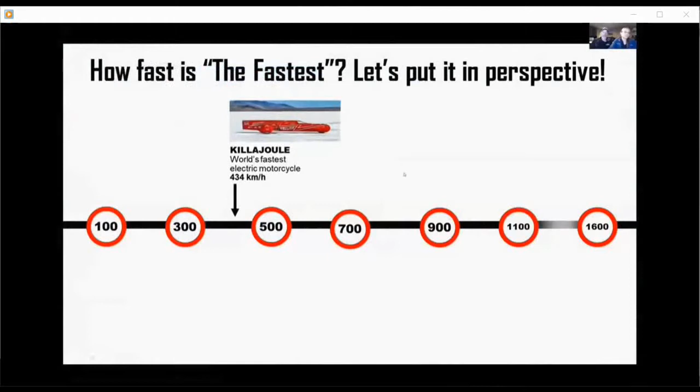The KillaJoule is currently the world's fastest electric motorcycle, and we'd like to put that in perspective, because lots of people talk about being the fastest, and there are many fastest vehicles. On a scale, we are at about 400 kilometers per hour. That's just a tiny bit slower than the world's fastest production car, if you can think of these very low series cars as production cars, but that's what they claim. I think it costs about the same as the KillaJoule, maybe more - oh yeah, it costs way more, that's Koenigsegg, maybe $1 million. Even if that's the fastest production car, that's a whole lot slower than the fastest wheel-driven car, which recently posted speeds over 700 kilometers per hour.

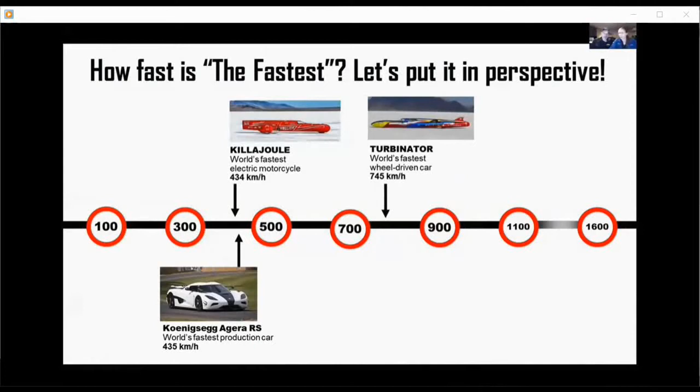A lot faster than your typical family car. My Nissan Leaf wouldn't even do that kind of speed, but it takes me where I need to go.

If we look a little bit historically, in 1889 the fastest car in the world was actually electric. Since then, internal combustion has completely dominated everything. Well, we had the sidecar record briefly - okay, I guess that's true, for a very brief moment, for a couple of years. The KillaJoule was also the world's fastest sidecar motorcycle. Full stop. We had it, and then they figured out what we were doing, and then someone took that away. So records are never owned, they are only borrowed for longer or shorter time.

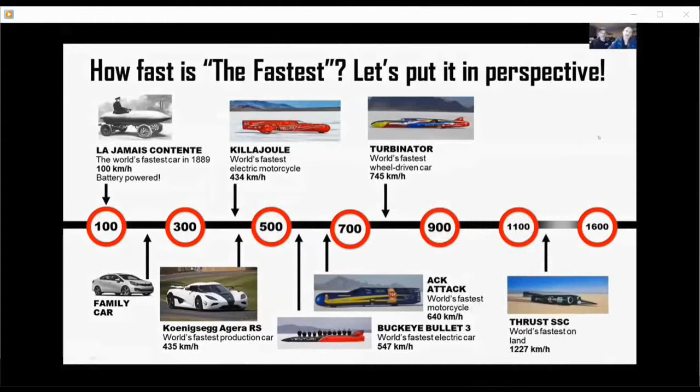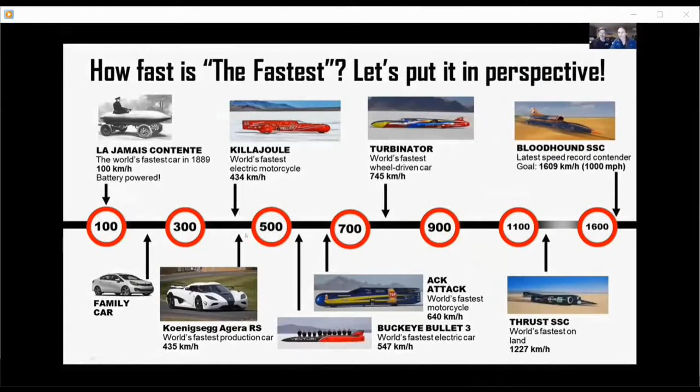We are still quite slow compared to the world's fastest electric car, which is about 550 kilometers per hour, which is also slow compared to the world's fastest motorcycle at 640. All of these are quite slow compared to the world's fastest car overall, which has gone supersonic, which again is slow compared to the latest, the British Bloodhound, that's shooting for 1,000 miles per hour. So that's a little bit of perspective of where we are, and you can see there is lots of room for improvement in speeds.

So that's kind of where we are and what we're doing. When we started building the KillaJoule, we had a dream, but it was actually not about speed, even if that may sound strange. I am a tree hugger at heart - Bill is kind of a tree hugger too. I like trees, you like trees - I'm the real tree hugger, yeah, I don't hug them. I've always been this way - I want to save the planet, but I also like fast vehicles and engineering, and how do we combine the two.

As am I. So our dream was actually to make people understand that electric cars are great. You can tell a joke here about British cars - can I? Okay, I think you can. The reason the Brits haven't come out with an electric car these days is because they haven't discovered how to make them leak oil in the proper manner. And they're far away enough so they can't hit us - no, they can't hit us.

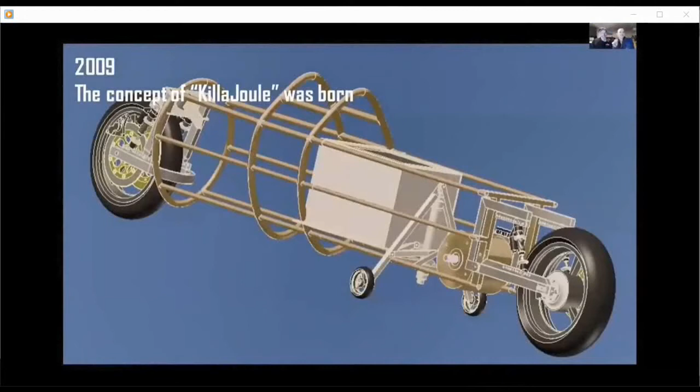I guess this is the equivalent of a sonogram for a racing vehicle - this is the very first, first early CAD. And then being on a budget, we bought a $750 Craigslist motorcycle - Craigslist is equivalent to Trade Me or the local eBay marketplace. We never even started it because we didn't care if it ran or not, we wanted the brakes, we wanted the wheels, because buying new brakes and wheels was way outside our budget. And this was cheap, so we bought this one.

So we had this totally naive idea that we were going to build a streamliner for $10,000 in a year. And we ended up - well, we're still not done yet - but the KillaJoule, we spent 9 years on it, and I don't even want to think, I can't, it just consumes. We would have owned two Teslas if we hadn't built this. Anyway, we bought this motorcycle.

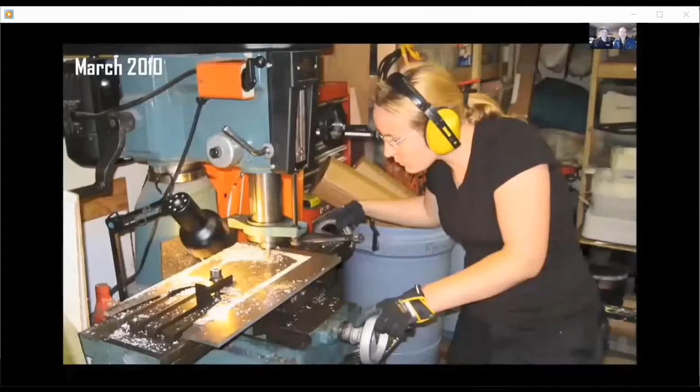And his uncle - that's right, he grabbed his uncle, wonderful couple of people, kind of like Bert and Ernie actually, a little bit like Bert and Ernie. I don't know if we have a picture of Gary in here - yeah, that's the uncle's name. Anyway, we spent a week cutting away, bending, working, grinding, and about 5 days later, we had - there he is.

And we had first chassis. Here's my very first test ride, and we thought, oh, we are almost done. We built the streamliner in 5 days.

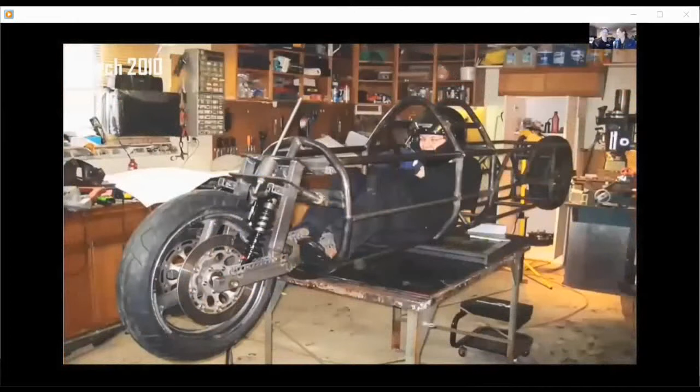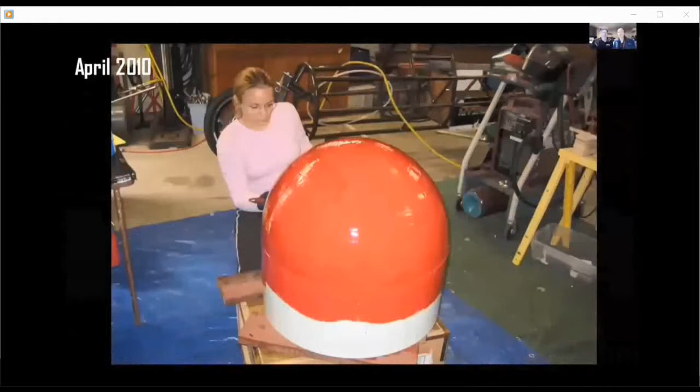Then, okay, this one has to be covered in bodywork, and a fiberglass body of this size is about $30,000, $40,000, $50,000 or so. Didn't fit in that $10,000 budget, so I thought, it's about round on the nose, and then pretty much straight in the back, like a toothpaste tube. So I bought myself a Pilates ball, and then I stretched my composite skills and made a nose cone.

And somewhere along the way, I ran out of volunteers, so I recruited my mom, who was foolish enough to visit me in Colorado. So she was put to work. She's a mechanical engineer as well, but she claims the statute of limitations ran out a number of years ago—she doesn't do it anymore. Everyone in her family is an engineer: her brothers, her father, her mother, everyone. So it's a genetic disorder. It's definitely a genetic disorder.

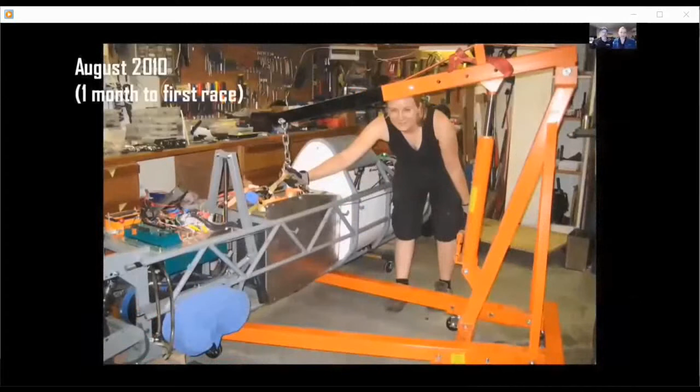So this was August. Race was scheduled for September. In August, we had 1 month left before we were leaving to Bonneville. By the way, we had never been to Bonneville. We just thought, let's build a streamliner motorcycle because we want to set a speed record. And if you want to go really fast, you have to build some sort of streamlined vehicle—that will always beat the open vehicles. And we settled for a motorcycle because you get a whole lot more speed for your money in a smaller vehicle. Also, we couldn't fit a car in the trailer either.

So we settled for a fully enclosed streamlined motorcycle. What we didn't know at the time is that motorcycles come in 2 versions: 2-wheelers, so solo motorcycles, or sidecar motorcycles. So the Killajoule was built as a 2-wheeled motorcycle.

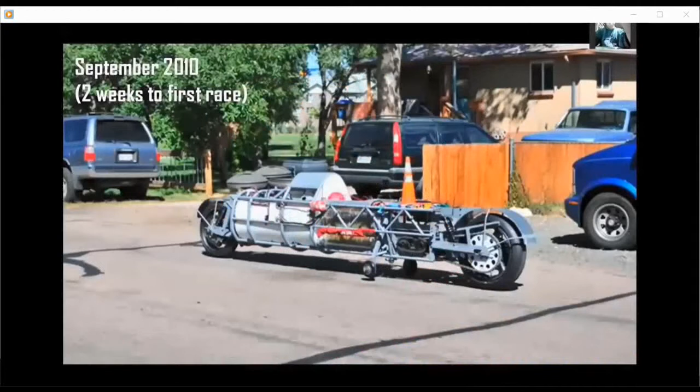So 1 month left to the first race. 2 weeks to the first race was the first time we had it running. This was an early Sunday morning—it's a good way of meeting your neighbors. You can drive around the block. And you can see here, it has a little landing gear, a pneumatically actuated landing gear for low speed.

I drove around the block, and 2 weeks before our first race, this kind of summarizes my whole feeling—realizing there's no way ever I can drive this thing on 2 wheels. Can't balance it. I could barely steer it, couldn't balance it. But, you know, show must go on. We had a race to go to. We were committed. So we continued.

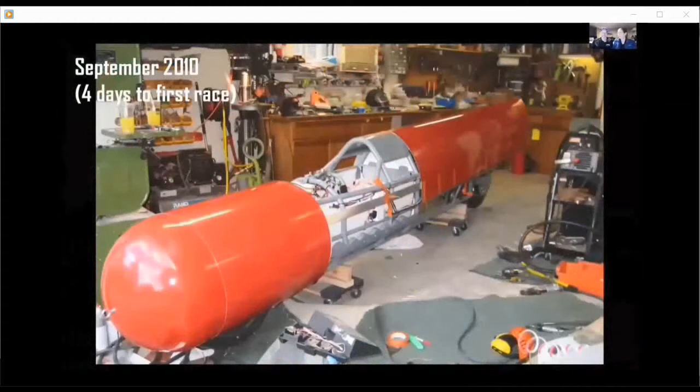4 days before the first race, we still didn't finish the bodywork. I wanted to throw in the towel. No, Bill said, no, we are committed. We are going.

And we took this pre-painted sign stock—an aluminum panel pre-painted red on one side, white on the other side, with protective plastics on it. Bent it over the knee, taped it down, screwed it, and Clecoed it into position. You can also see, if you look on the side, all the lead ballast bolted to the frame because it wanted to tilt over, fall over to the right all the time. And we added all the lead we could find in an attempt to get it upright, but I kind of knew at this point there was no hope, but on the other hand, there was no choice either.

So we finally left 1 day later than we should have, and it was kind of finished. We showed up to Bonneville. We made it there with something that looked like a streamliner.

Everything ran great except, as I had suspected, I could absolutely not balance it on 2 wheels. Steering was really poor—it had a limited range of steering and not much leverage. It was not good. It was also about half a meter too short in the driver's compartment. Yes, all of the above.

But we learned a lot, and the most important thing we learned is that there is a category for sidecar streamliner motorcycles, which, philosophically, I'd call an asymmetric car. It has an extra wheel, a third wheel, it drives like a car, but still qualifies as a motorcycle.

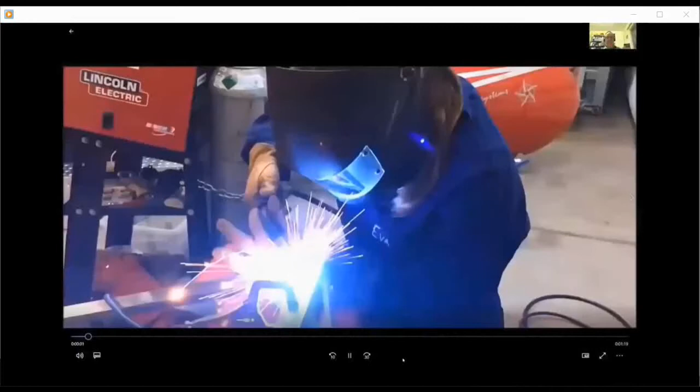This is about 7 years of work condensed to 1.5 minutes.

Thank you. A chill every time I see that.

When Eva's on it, the vehicle's going straight and everything, and she's really giving it the power. You can see it throws up this enormous rooster tail of salt behind the vehicle. It just comes flying out the back, and I can say, oh, oh, oh, here we go. You know, right? It's, oh boy.

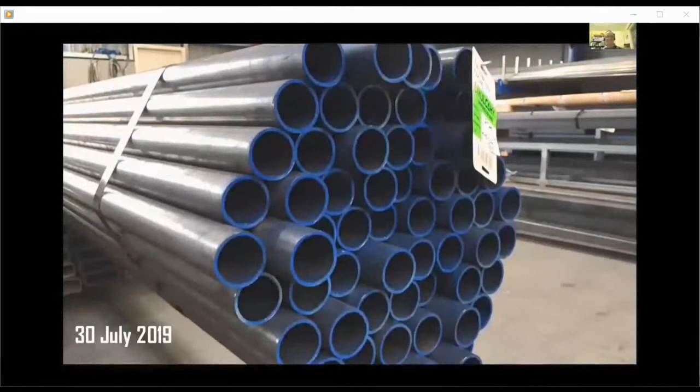So we started with this pipe. Just pipe. 30th of July, 2019, we bought pipe. We sent it to the laser cutting company, which is way cool - that's maybe another topic for another time. They took all our pipe, and in 5 minutes they cut it all up according to the plans, and notched the pipe. I don't know if you've ever notched a tube - it takes about an hour to do one. They did all the tubes faster than we could put them in a cardboard box. 5 minutes, the whole frame.

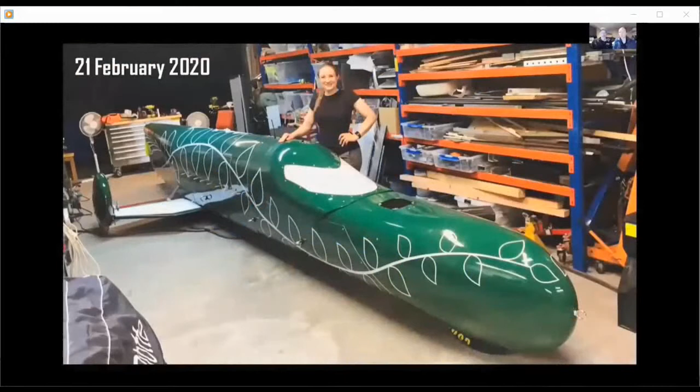But I had spent a month doing the CAD for that, and about a year of planning before that. Anyway, in 6 months this is what we had, and in 22 days the Green Envy was ready. If you want to see all the build photos, they're on Facebook.

So on the 25th of February, we loaded it up, sent it off to Australia, ready to race, and then you know the rest of the story - everything was canceled. This kind of closed in on us as we got closer to the race, and we kept saying, okay, we'll do this, we'll do it.

No, we're not. We arrived in Adelaide. We actually bumped our flight a day earlier so we could get into Australia before the 14-day self-isolation requirement went into effect. We were scheduled to leave Monday morning, but then they announced at midnight between Sunday and Monday these new rules were coming in. So Saturday evening we decided we're going to leave Sunday morning instead - we just packed our bags and changed the flight.

The vehicle was already there - it had been there a long time. We landed in Adelaide, and the next day they announced that the event was canceled. So, oh well. We did our best, and it will race again next year.

So a few things about Green Envy. This photo - I would say it's the Green Envy, it's the Lake Eyre salt flats, but in Australia - but they were not there at the same time. We took the photo with a bit of photo magic. The photo is taken in an industrial backyard in Adelaide, and then it's overlaid on the shadows from the Killajoule in the background.

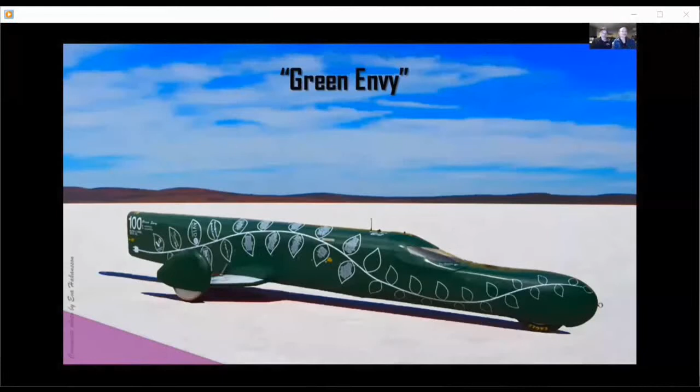A little hint of red behind the rear, next to the sidecar wheel, where I think that's a little of the Killajoule showing through. No, it isn't? No, it's the Killajoule sidecar. Oh, okay - but don't look too close, okay? I'm no expert in Photoshop, but this is enough to convince people.

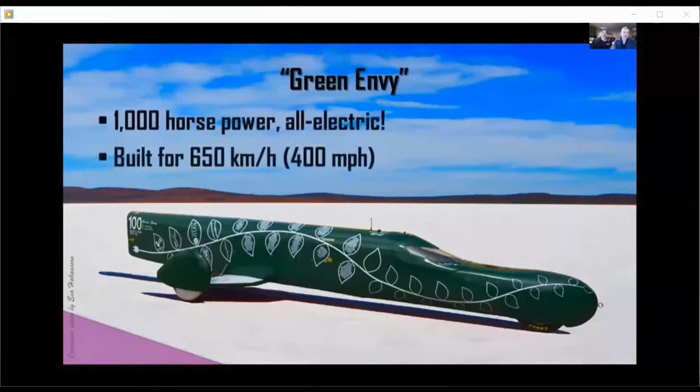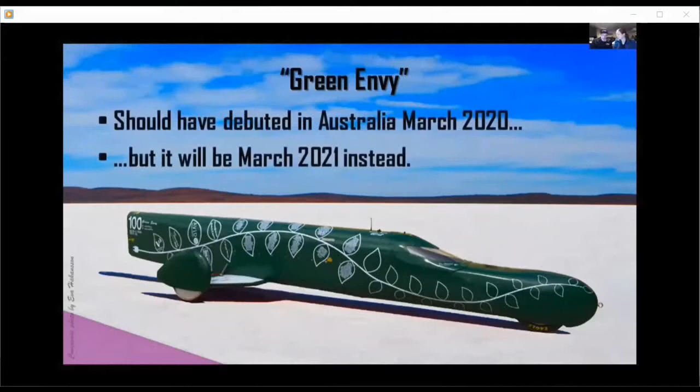So the Green Envy is 1,000 horsepower. It's all electric, and as we said, built for 650 kilometers per hour. It should have debuted in Australia in March 2020, but that will be 2021 instead, we hope. The dedicated among you may come see it.

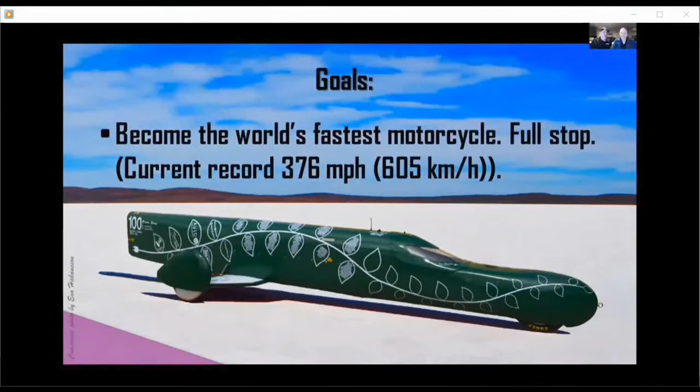And of course, the goal is again to show that electric vehicles aren't slow or boring. Look at the wheel on the side - notice that's not a rubber tire. That's interesting, and we'll get to that later. If anyone is interested, it's in my extra material.

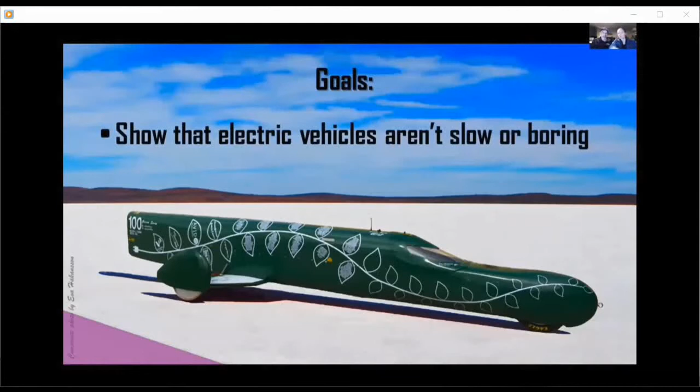So just a few stats, because we all like stats. In the current configuration of the Green Envy, which reuses the battery packs and a lot of parts from the Killajoule, its estimated top speed is only about 530 kilometers per hour. But that's really being on a shoestring budget and reusing a lot of parts we had - and that's about double the top speed of a Tesla anyway, so it's not that shabby.

0 to 100 kilometers per hour would be about 7 seconds, so it's a half decent family car. But 0 to 530 kilometers per hour would take about 56 seconds - so it's a steady, continuous acceleration, nothing like a sports car really. It's more like an airplane.

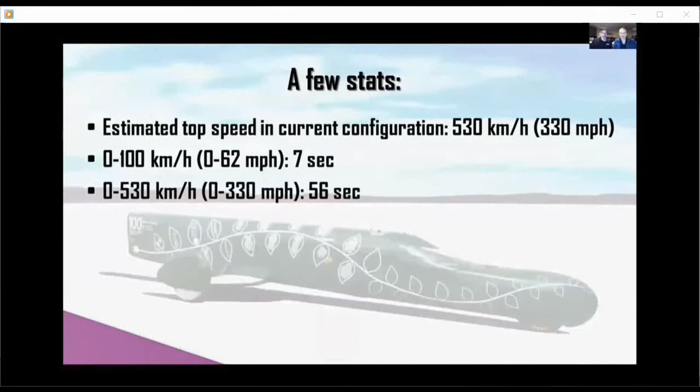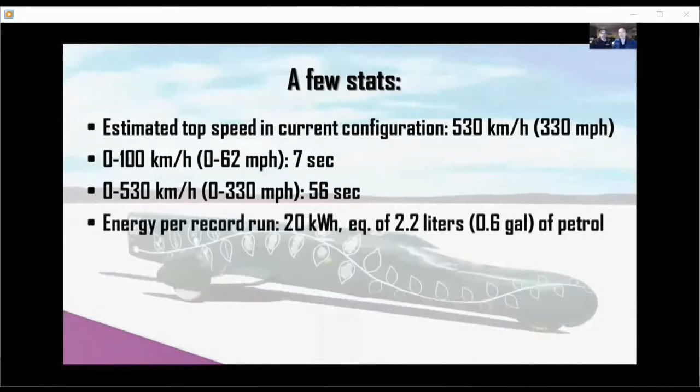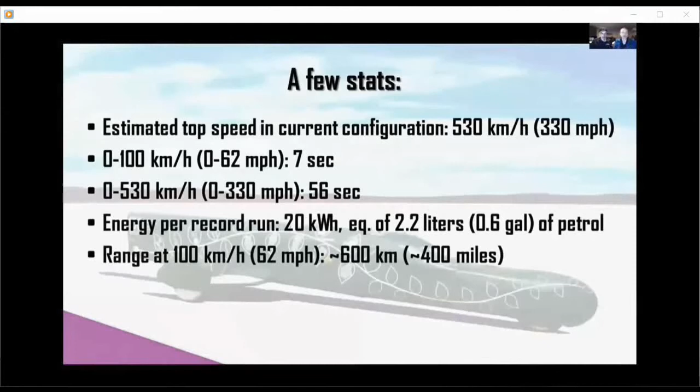So it's incredibly slick and fuel efficient, or energy efficient, which is expected from such a skinny little vehicle.

So I know you are all gearheads and tech heads, so we have a few bits and pieces from the inside which we think you might find interesting.

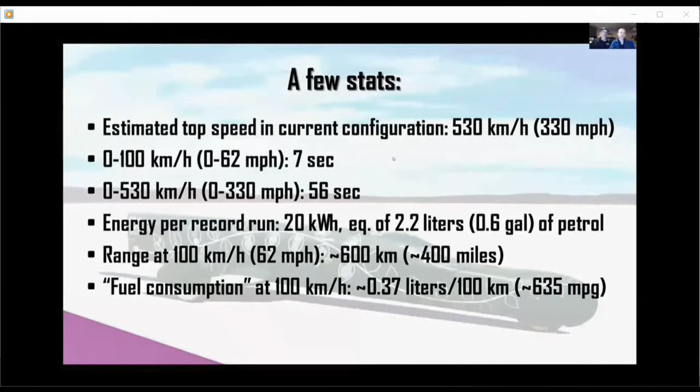In electric vehicles of this kind, and this is a quote from Bill, it is a giant cordless drill with wheels. That's really what it is. They're very simple in concept. There are very few moving parts, by the way. There aren't all kinds of things.

Gasoline or petrol cars have these enormous crews, but we only need a pair of us to run it. We take a crew of like 4 or 5 people just to do all the extra sorts of things, but we could run it with just a pair of us. Other gasoline or petrol cars, like motorcycles, they'll have a team of 12 people - a clutch man, a fuel injection man. For us it's just like you get in the computer and you go. It's pretty easy.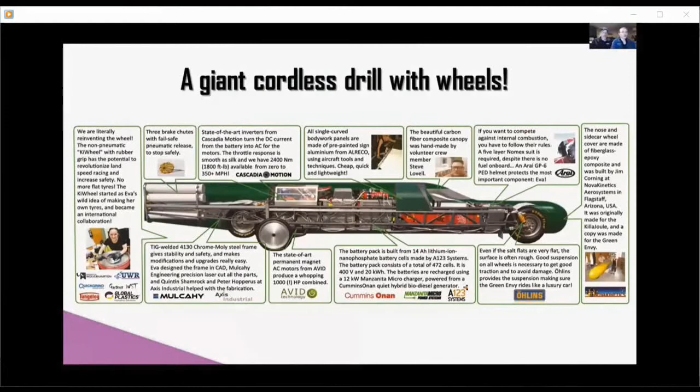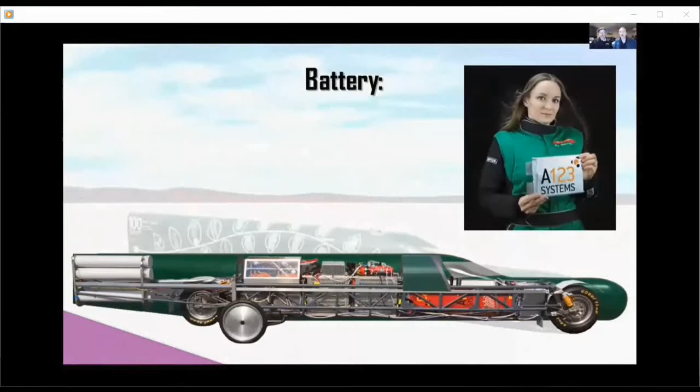Looking at the inside, everybody likes to know about the battery, of course. People that are not into electric vehicles think this is, well, I don't know. Let's just talk about the battery. The battery is really the heart of an electric vehicle - that's where all the horsepower comes from.

What we're using in the Green Envy is, because we are on a shoestring budget, we reuse the battery packs from the Kilojoule. The Kilojoule had 2 complete battery packs which could be quick exchanged. It would take about 20 minutes for us to unload 5 modules of batteries and put in 5 fully charged modules, perfect temperature, fully charged and so on. That allowed us to race under the FIM world record rules for motorcycles, which require that you make a backup run within 2 hours. At the Salt, we just couldn't solve the logistics of charging and getting back to the starting line within 2 hours, so we did a quick swap of batteries. But we couldn't really defend going to our sponsors and asking for a new battery quite yet.

So we took these 2 batteries and stuffed them into the Green Envy, just to show them we can do it. This was the good starting point. So we have about 20 kilowatt hours, 400 volts, about 250 kilograms all together.

If you're into electrics, I'll tell you the configuration: there are 2 packs, and they have 2 cells in parallel, and they look like those space needles that I hold in my hand there. Then there are 118 of those pairs in series, and each cell is 14 amp hours. These are lithium-ion iron nanophosphate cells from A123 Systems. You probably never heard of A123 unless you're into RC cars, perhaps, but they make these cells for hybrid vehicles.

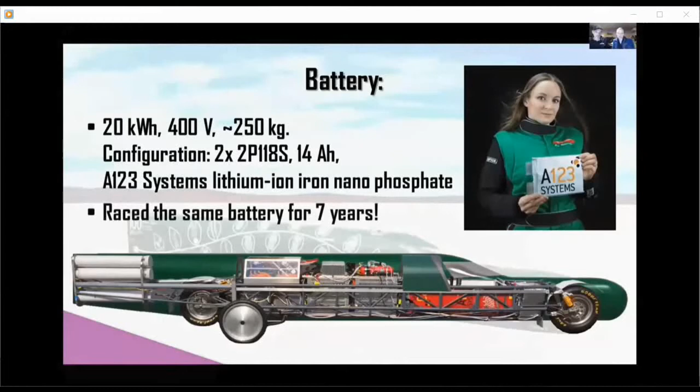So on the inside, this is what the battery pack is: 10 modules, 8 big ones, 2 small on top, really 2 battery packs next to each other, and the fire extinguishers are on top. These are CO2 fire extinguishers, and they are mostly just window dressing because the rules require us to have an onboard fire extinguisher system.

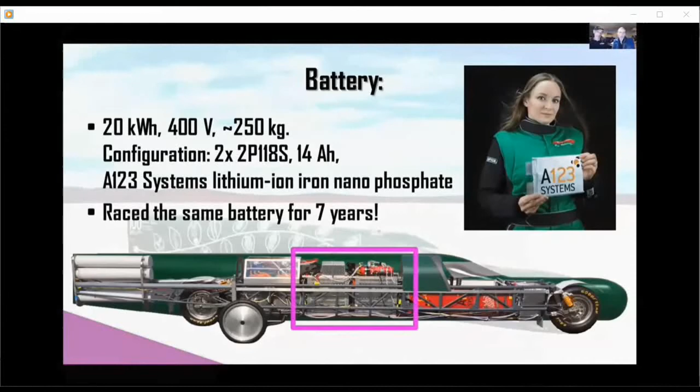So motors and inverters, you asked about that. We're getting to that. We have 2 motors, they're from Avid Evo AFM 240, which is actually a British-made motor.

Yes, so it's British. I shouldn't joke about British anymore. Now you're in trouble. We love the Brits, yeah we do. Actually, if it hadn't been for Brexit, we would have maybe moved to the UK. But we couldn't, my immigration status was too uncertain with Brexit, so we chose New Zealand instead, which we're very happy with.

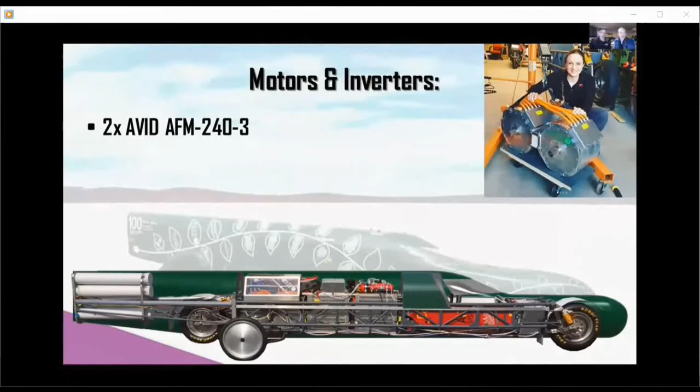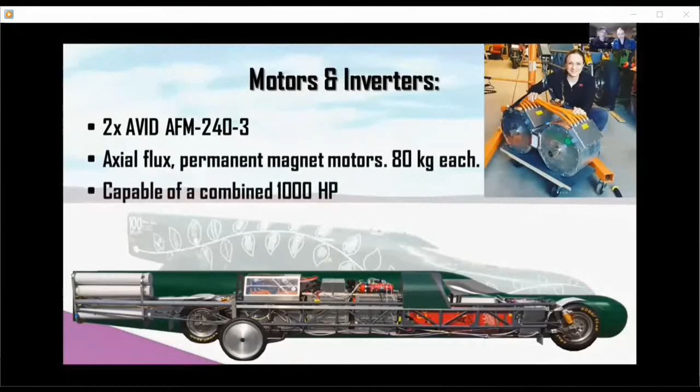Anyway, we have two motors, you can see them up in the right corner. But electrically, there are 4 motors - these are basically two-cylinder electric motors. You can see there's 6 wires going into each housing instead of 3, and each is a 3-phase motor, so we have 4 3-phase motors connected to 2 shafts. I'll show you in the next picture how they are chained together. The axial flux permanent magnet motors weigh about 80 kilograms each, capable of about 500 horsepower, or a combined 1,000 horsepower. Because there are 4 motors, we decided, because it's the easiest solution, we ran 4 inverters. That takes the DC current from the batteries and changes it into AC voltage for the motors to use, at a variable frequency because they're variable speed.

The throttle response is incredibly smooth. It actually has reverse - the electric motor doesn't really care which direction it goes, so I have a flip switch on the side, and I can go in reverse. If I knew how to parallel park, I could parallel park. No, I actually know how to parallel park, but I'm not terribly good at it.

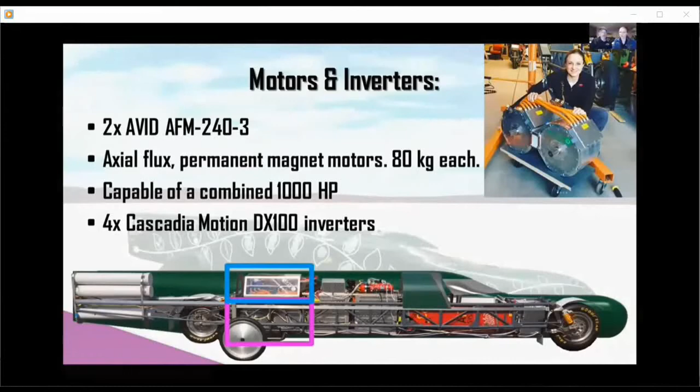We drove it into the trailer yesterday, or last week. A couple of days ago, we needed to get the Green Envy out of our workshop and into its sea container because we had a giant delivery coming. It's heavy, and it typically takes 2 people to push it into the container up the little ramp - somebody's got to drive and someone has to steer. Bill had an engine overhaul himself 4 weeks ago, he got a new heart valve, and so he can't push anything. Bill was cut open like a chicken and got a new heart valve, and it's now healing up, so he's not allowed to push, and it needs to get into the container. I thought, I'm just going to drive it, and it went up smooth as silk. We drove it maybe at half a kilometer per hour or a kilometer per hour, it just went creeping up there like a forklift. It was great, it's posted on Facebook if you want to see the video.

Anyway, there's the motor to the left with the sprockets. The 2 motors are chained together, and then there's 2 sprockets on the rear motor, and the other sprocket is chained directly to the rear wheel. The motor sprocket is bigger than the wheel sprocket - think about that for a minute. This is geared for almost 400 miles an hour, so the motors are not turning as fast as the rear wheel.

But it's a low RPM motor. It is, so the maximum RPM on these motors is about 2,800. And at 400 miles per hour, the rear wheel turns about 5,500. So is that how you get the increased speed? If you're using the same battery packs and motors as you were in Kilojoule, how do you get that increased speed - is it just purely the gearing? We have to change the gearing to match the horsepower supplied, because the motors will peak out at a particular horsepower and speed of the vehicle. So you kind of play around with getting the gearing just right for the miles per hour, because you don't really know how much horsepower the vehicle is going to absorb.

I think also, and maybe the answer to your question is more simple than that - Green Envy has twice the drivetrain of the Kilojoule. The Kilojoule had 1 of these motors, Green Envy has 2, so everything is doubled, except the miles per hour, which isn't doubled. I can't really hold a quiz here because you're all muted, but Mike can maybe answer the question: if you want to go twice as fast, how many times more horsepower do you need?

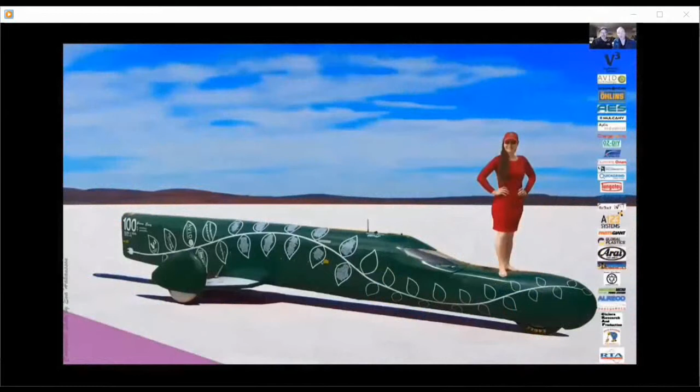People think it's easy to raise sponsorship for racing. No. We concluded if we flip burgers at McDonald's instead of chasing sponsors, we'd make about the same amount of money per hour. It's like convincing your neighbor to give you money, like convincing them to buy you a big screen TV. Why would I do that? Well, I've got cool friends and they'll come over. How would that benefit me? Well, you get to come over too. Can I just buy the big screen TV and they come to my house? Oh, don't even think of that. No, you're not cool enough.

So we're happy to answer whatever questions there are. We have like 40 more slides that we can pick from. Don't tell them that. But I mean, we can pick from them as the questions come up.

And I will just show, because we brought this up a little bit, the side profile per motorcycle, and you can see in the frontal area that's really where you can get a lot of speed for a little money. Yeah, horsepower costs. Oh yeah, I reckon.

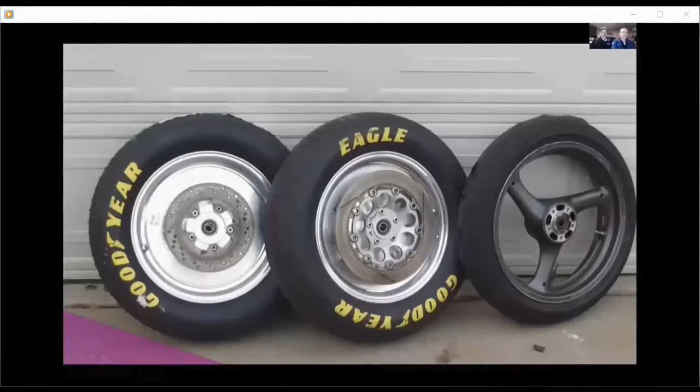Tell us about the key wheels. Yeah, thanks, there you go. Yes, so that's kind of what we expected for a question. I take that as a question.

So the key wheel is an interesting project that we are all in itself, and the land speed community is fascinated. How's it going? How's it working? Everybody wants to know how the key wheels are going, and they're working.

All right, so let's give a little bit more background. In land speed racing, the absolutely weakest link is the tire. Click on that link, there it is.

So this is where we originally ran on road racing competition tires, and at 213 miles per hour, it was an exciting moment. I was right in the measured mile at Bonneville, and suddenly I hear this pop pop pop pop pop sound, and smoke fills the cockpit. Oh, not smoke, but a little veil of smoke kind of comes into the cockpit. Never a good thing in an electric car.

No, so, I'm on fire. I know it's a common occurrence on British sports cars, older ones. Been there, done that, I've owned a few. Yeah, your brother had an Austin Healey Sprite, 64, I believe. So you've had this in the family, so you can't say anything.

Anyway, it's not a good thing when you're at 213 miles per hour strapped in a soda can. So I just immediately shut off the power, deployed my brake chute, rolled to a stop, jumped out, probably at record speed, and discovered there was nothing wrong with the vehicle. That you could tell. That I could tell.

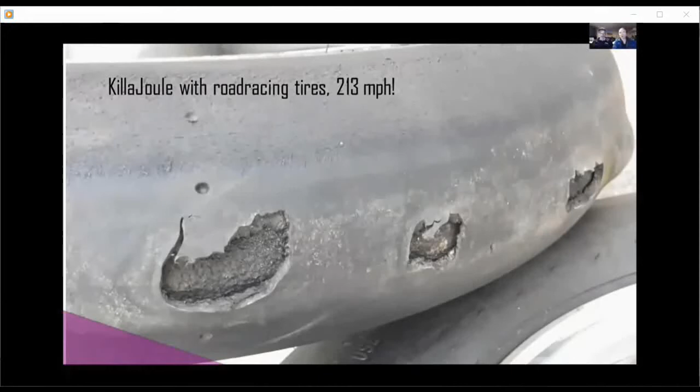This was the second to last day of racing, and we just thought we're calling it quits, we broke something, even if we couldn't find out what. I came home, took apart the vehicle to clean it, and discovered that pieces were missing out of my front tire. Ooh, that was a close call. And the back tire was equally lumpy, hadn't burst yet, but it was just about to burst. So we thought, okay, we've run out of tires, we have to do something about it. So we went onto the commercial market and learned that there weren't many tires to buy, and that the smallest size is the size for a small car.

So to the right is our old normal road racing tire, and to the left are the smallest possible tires that could be obtained within our budget from Goodyear Eagle. They're only about $1,000 a piece or so. And then the rims, you have to make rims for them.

We had to adapt car tires to go onto motorcycle hubs and axles, and we ran those. They work well, but people have tested them at speed, say about 300-something miles per hour, and these will fly to pieces. So I was pondering this, thought, okay, I'm going 300-400 miles per hour in a soda can, and the only thing that really keeps me alive is a little piece of thin rubber filled with air. This is not a really good idea.

When a tire goes, it takes the whole vehicle with it often. It bursts, it takes a fender or parts of the fender well with it, and then you wreck the vehicle and it turns it into a ball of metal with the driver compartment in the center. And this is not good, because the tire comes off in a big chunk. There's 10,000 G's on the tire. So it's one of the most common causes of accidents, tire blowouts.

So I thought, I want to run a non-pneumatic tire. The jet cars are running solid wheels, so we should do something similar. The idea was a non-pneumatic tire, but it has to have rubber grip because we are in a wheel-driven category, and we can't just run on solid wheels like the Bloodhound and other jet cars. But it had to be a design where the rubber wasn't dependent on adhesion, so basically, the rubber can't just be glued onto the wheel, because it will overheat and fly apart.

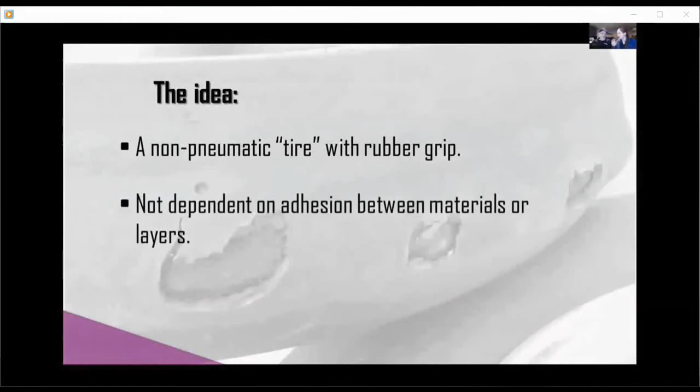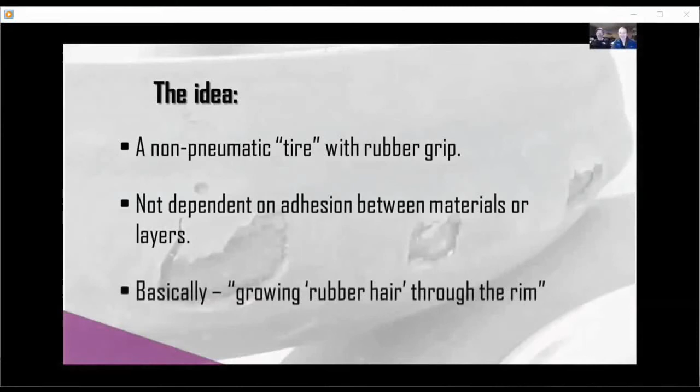We had a few different designs. I'll take credit for the initial idea of a rubber tread that was mechanically held in place, but it was Bill's idea that we could just grow rubber hair through the rim, so that it was like a stubble. What ended up being was the key wheel. If you look at this wheel, this is actually a solid wheel that has grown rubber hair through it, and then it's secured with a retention band on the inside.

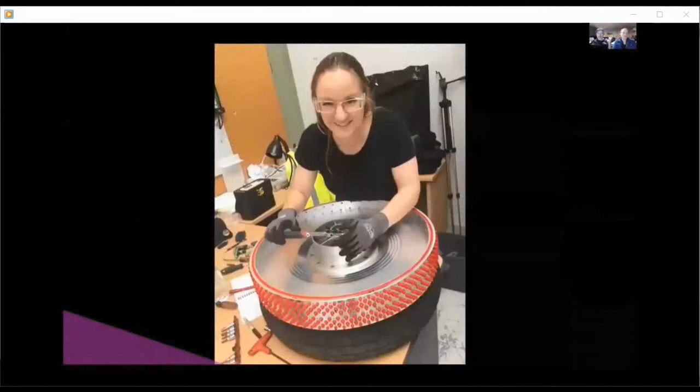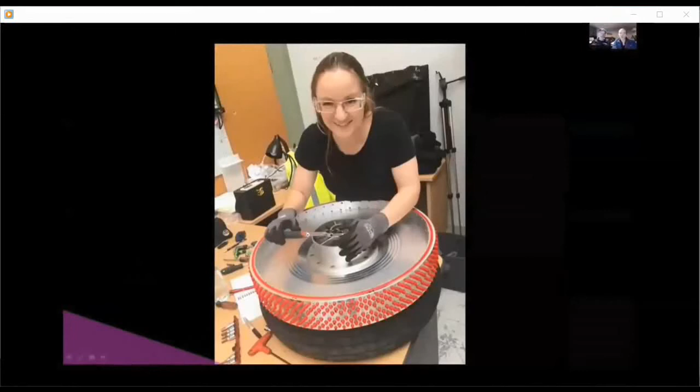For slow speeds, we make sure these mats don't get pushed in. At high speeds, they're pushed against so hard you couldn't pry them off with a screwdriver. But at slow speeds, the salt can push in and build up under it, and then they'll eventually fall out. If you look up close, this looks like something NASA would have put on their Mars rover. But if it was a Mars rover, we'd probably put down a message in Morse code, but we're not, because that would be out of balance.

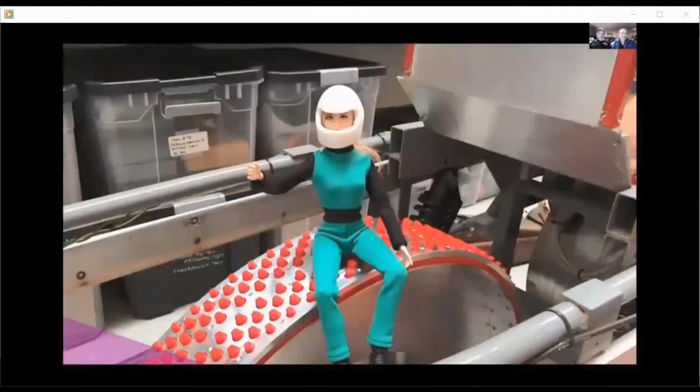It wouldn't be good. And there it is installed, and there's my own action figure Barbie that I bring out when I meet kids. I have to tell the story about the Barbie.

So we were at a big car show last year, and I had my mini Eva action figure with me. There was a little boy, maybe 4 or 5 years old. He was looking at this doll, and he was looking at me, he was looking at this doll, and then he said with a firm voice, 'Girls can be race car drivers too.' And I thought, mission accomplished.

So that's kind of where the key wheel idea is. I have a ton of photos from the manufacturing of it. It goes on, things go on, but we have a good partner in Volcaprint, in Belgium. So I made all these pieces myself.

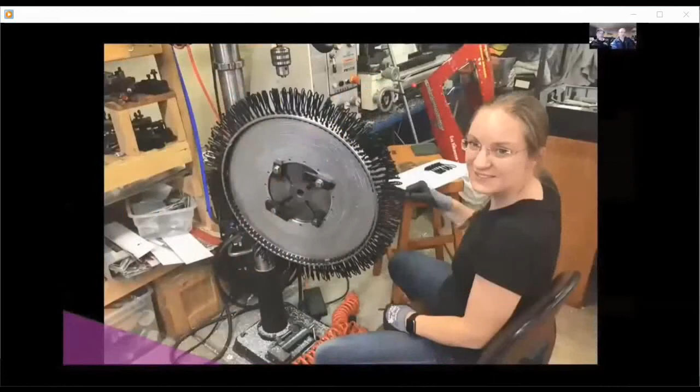I would just quickly flip through the slides. The first wheel we built with a friend of ours on a CNC machine in his garage. We put the holes in, and I 3D printed the rubber, installed it in a different way, pulling it through. So this was our very first prototype, which worked, but not terribly well, because the rubber didn't really stay in. It pushes in, the salt pushed in the nubs.

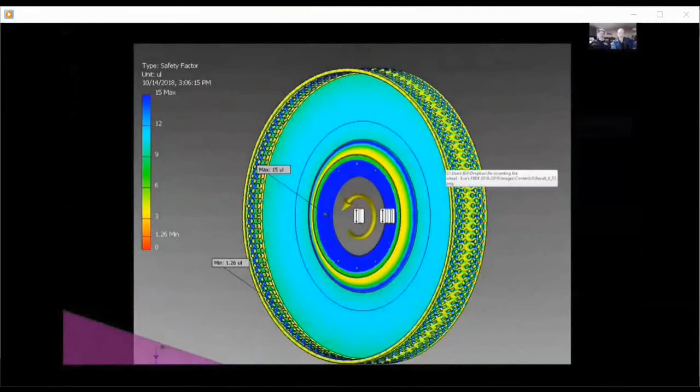So then the new design was a much more sturdy design. We ran all the finite element analysis to make sure it could actually withstand the speed, despite all these holes.

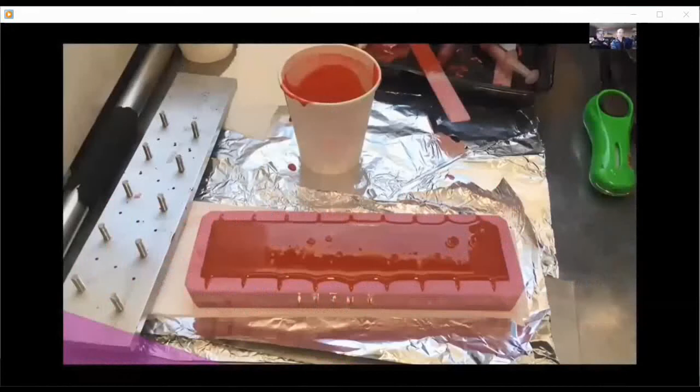Evaluated rubber, and then what I did, I 3D printed the plug and cast myself a mold. Vent holes was a bad idea, but I thought it was a good idea at the time. So that's the rubber mold where the pieces are cast. And then I cast an industrial rubber at the University of Auckland, where I used to work in their lab. This is something I hope I never have to do again, because it's incredibly difficult if you don't have the right tools or skills.

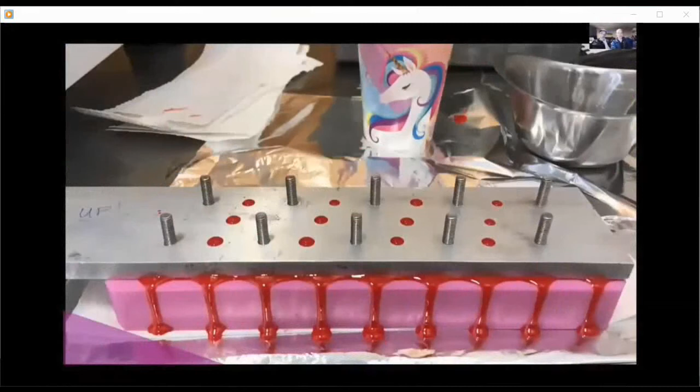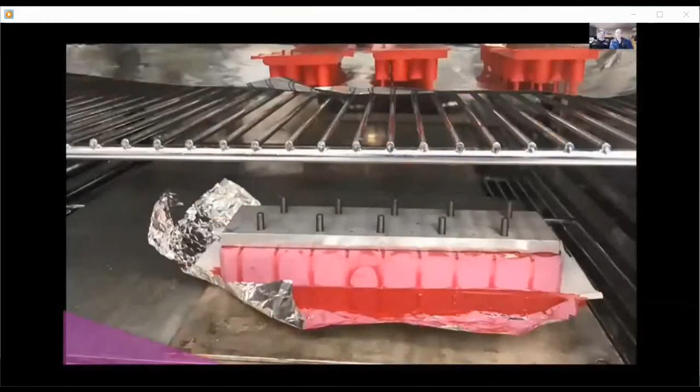You have to work at 120 degrees Celsius for all the components, and you have a pot life of about 2 minutes. But I made the wheels. We ran them at 236 miles per hour, 380 kilometers per hour last year in Australia. So it was a success in that we could prove that we could do it.

We post it on social media what we do to everybody's scrutiny. Volcaprint is a company in Belgium, and they make the world's fastest roller coaster wheels, polyurethane roller coaster wheels, and they are actually, as we speak, making new rubber inserts for us from their super high-tech, high-performance material. We're very, very excited about that. He's also making contributions as to the profile of the rubber and things like that, for lack of heating, and it's very, very good to have a polymer expert involved. He's the best in the world. So we're having a good time.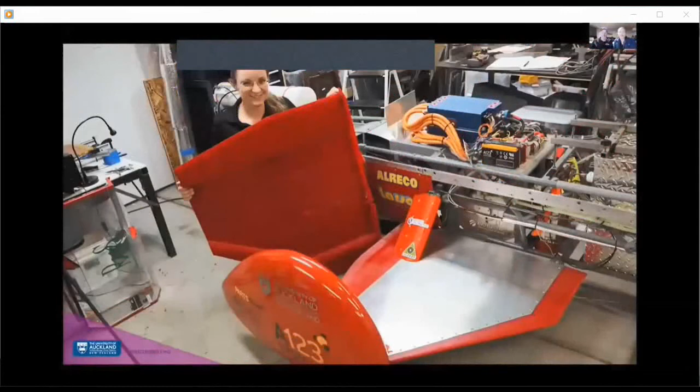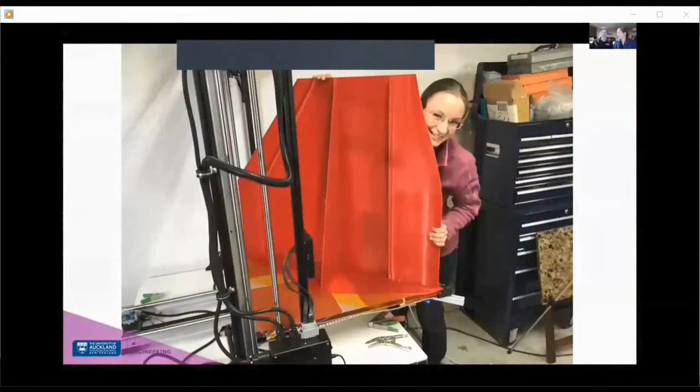So this is the sidecar fairing, which is actually 3D printed — one giant piece of plastic, and we built the 3D printer to make it. That's a 6-day print on this big printer. That way we could get the exact complex shape we wanted, and the shape is designed in CAD and run through.

Question, Barry: the downforce generated by the wing on the right side, does that cause instability? It doesn't really cause instability, but an asymmetric vehicle is never favorable — it's never really of any benefit to you. The only benefit is that we end up in the motorcycle class, and that was the big benefit, that we compete against two-wheelers with our three wheels.

Also, the Green Envy, between runs in the pits, you can shim the tail so it will turn like a rudder a little bit, to keep the vehicle straight. So the tail is actually a separate piece.

For the KillaJoule, we weren't really thinking about that, we had a whole lot bigger problems to solve when we built it. The way it compensated by itself for the asymmetry is it actually crabbed a little bit, so it never really ran with its nose straight forward. You'd adjust the rear wheel and the sidecar wheel to work with the crab, so under power, if you added throttle it would still go straight, and if you released throttle it would still go straight.

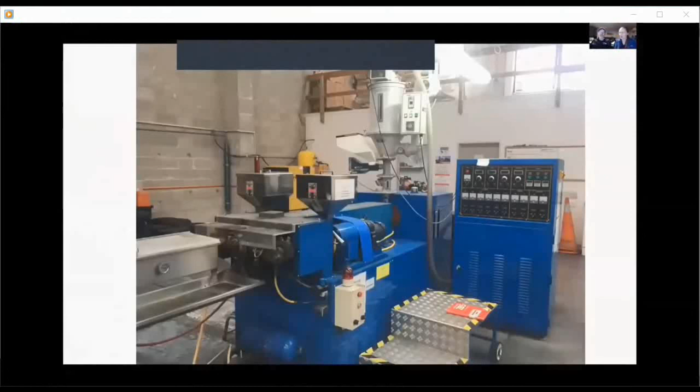So we're just starting up a business, and we just bought something last week. We bought a machine that used to make single-use drinking straws, which no one wants anymore. Now we want to make 3D printing filament. During this process we've learned a lot about 3D printing, and we're getting people excited about it, it's a market that's skyrocketing. Wish us luck.

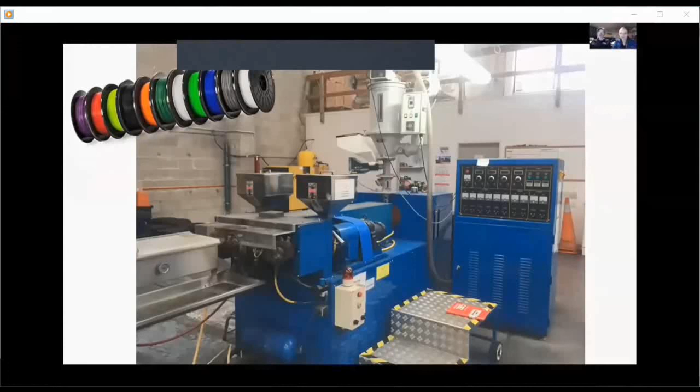You asked? Yeah, and this isn't even public yet, you guys are the first to know, you won't find it on the Facebook posts. That's more than we've shown - we moved out for a big delivery. That's why we had to move the Green Envy out and get it into the container, because this thing was arriving.